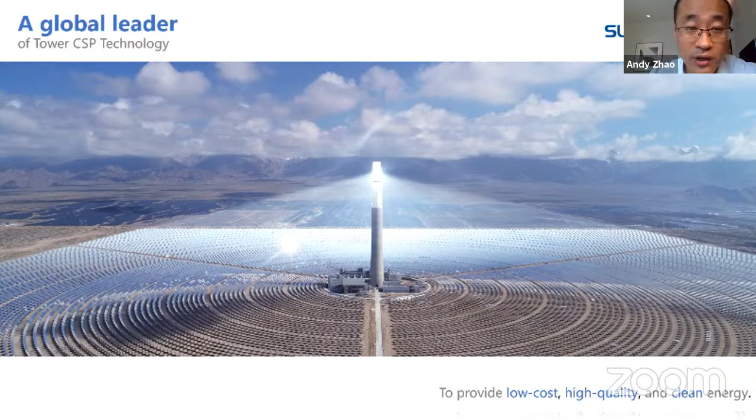First, please allow me a brief introduction of SUPCON Solar. We are a technology provider for tower CSP, and we are actively involved in international practice - for example, in IEC standards, in the World Bank promotion program, and also we answer the call of SolarPACES for technology innovation.

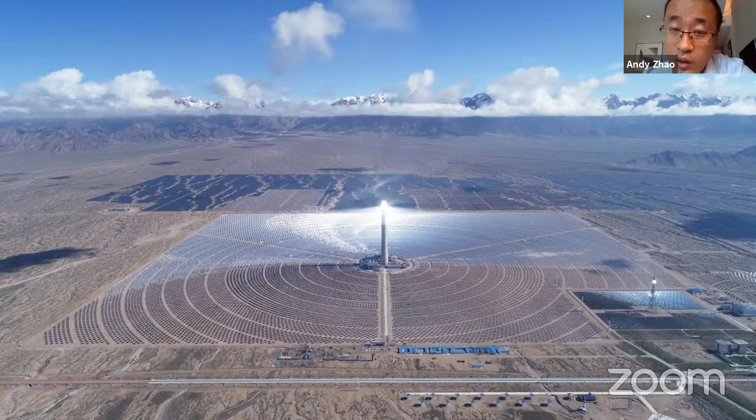Right now we have 4 references in and out of China. In August 2016, we delivered the Molten Salt Tower CSP, which is the first one in China and also the third one all around the world. The project performance has been quite well ever since.

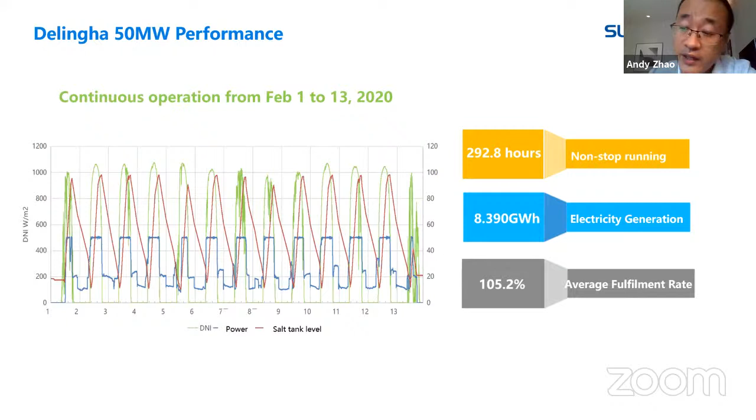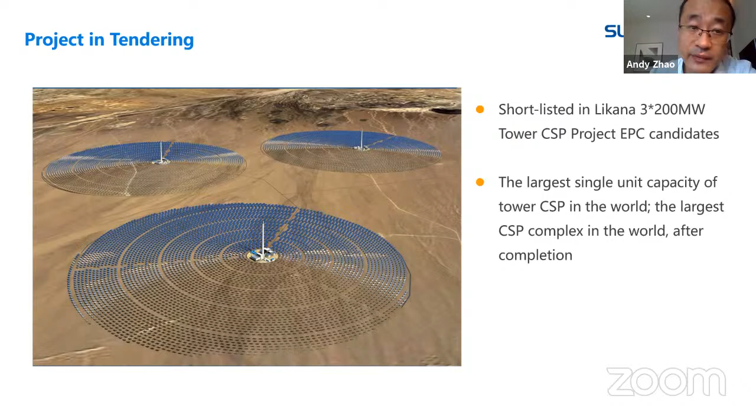Talking about energy storage, the first thing people think of is a battery, because it's so common in life - we have mobile phones, laptops, and electric vehicles. Because we are humans, we tend to accept what we are already familiar with. But is a battery really a universal solution, or is it just an illusion?

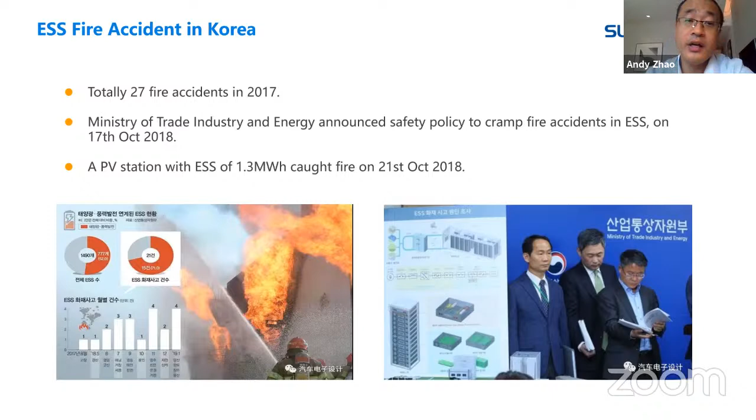In 2017, there were a total of 27 fire accidents in Korea, and the ministry announced a safety policy trying to clamp down on fire accidents. However, 4 days later, there was another fire. So what are the reasons leading to all these accidents? Here are the findings: battery defection, insulation failure, dusty operation environment, and also issues by system integration.

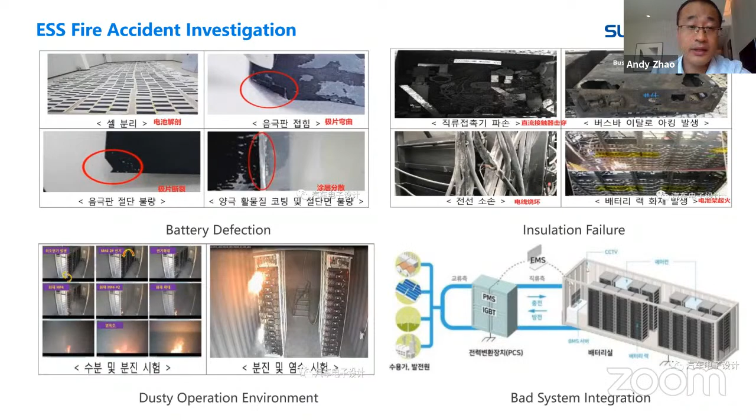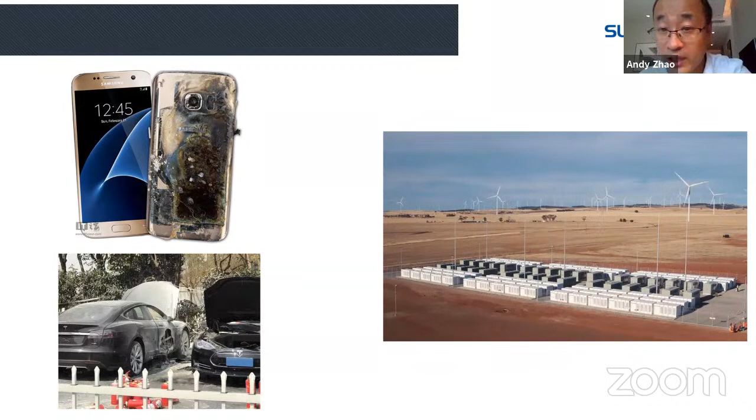So really, is the battery bankable, or is it more reliable, or is it safer, or more efficient, or cost effective? I think it's quite different from what people assume.

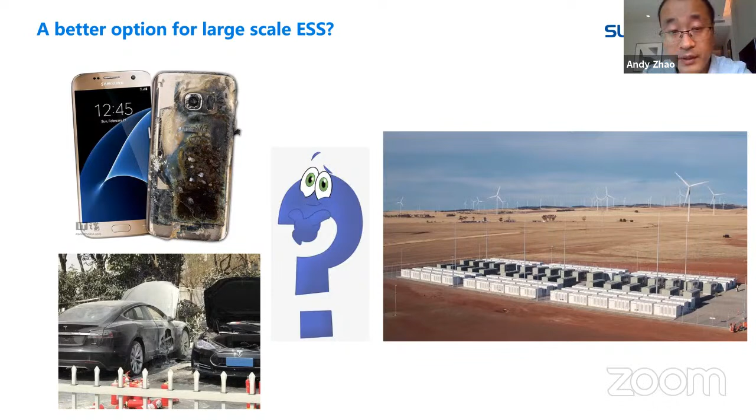So let's talk about molten salt and thermal energy storage. Actually, molten salt is not very mysterious because it's mainly used in industry and not for civil purpose, so common people are not very familiar with molten salt. And how about thermal energy storage - is it a very new idea?

Is molten salt only used in CSP? No - for example, it's also used in nuclear power and in the chemical industry. Is molten salt a recent application in CSP? No, because back in 1996 in the USA, in the Solar 2 CSP project, it was already being applied.

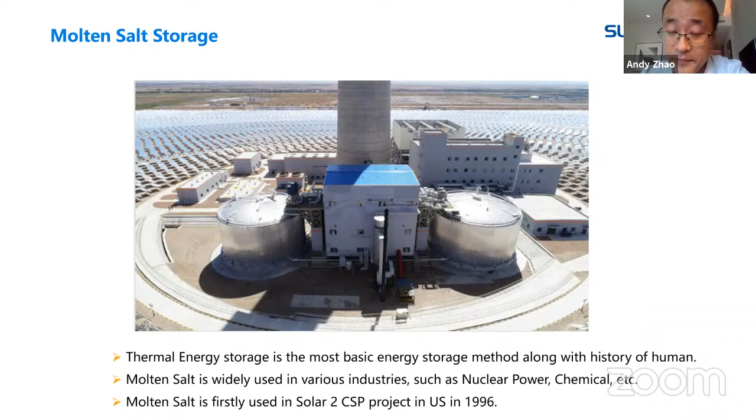But we do realize there are some challenges, and also some accidents related to molten salt. For example, there is one project where the molten salt got frozen in the pipe, and the whole downcomer became solid.

Yes, it's true, but is it unavoidable? No, it's not at all. This is why we have heat tracings following the whole route of the molten salt flow.

So why did it happen? What's the reason? Here are some of our assumptions: How about the heat tracing - does it work well, or is there any redundancy for the heat tracing? And is there any alarm for low temperature to the operators?

Has the operator spotted the alarm? Or if he already spotted the alarm, what action did he take? And if there is no alarm for the low temperature of the molten salt, then how about the temperature transmitter - does it work well, or is it located at the correct monitoring point? So this is our assumption.

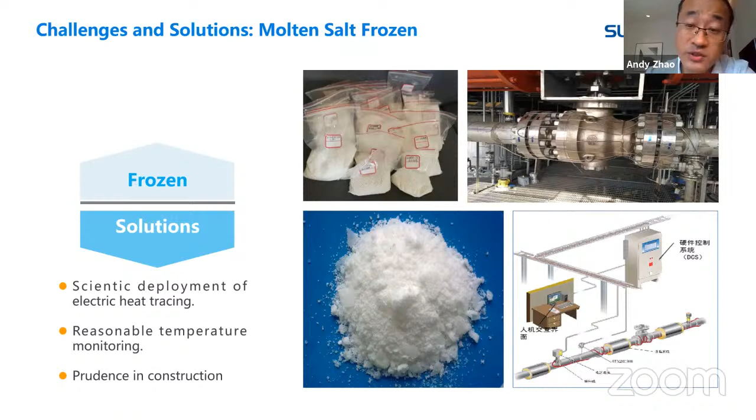Next topic is about the tank. Talking about tanks, people think of leakage, then get very nervous and very concerned. But I'd like to ask, how many molten salt CSP plants do we have around the whole world? Almost 50. So there is one leakage, and it seems all the molten salt tanks don't work well - that's not right, that's not the way to think about it.

Engineers will identify the potential risk in the structure and do the corresponding design to try to handle the thermal fatigue and also the thermal shock. And the same thing happens to the foundation, to the basis.

For example, engineers will optimize the design for the stress distribution to make it distributed evenly, and also make good ventilation for the foundation to prevent the temperature being very high on the concrete.

The third thing we need to keep in mind is the workers, I mean the welders, they have to be very careful. They have to follow the procedure and try to reach the standard. And the last thing is during operation, special attention has to be paid to the impact on the flow of the molten salt.

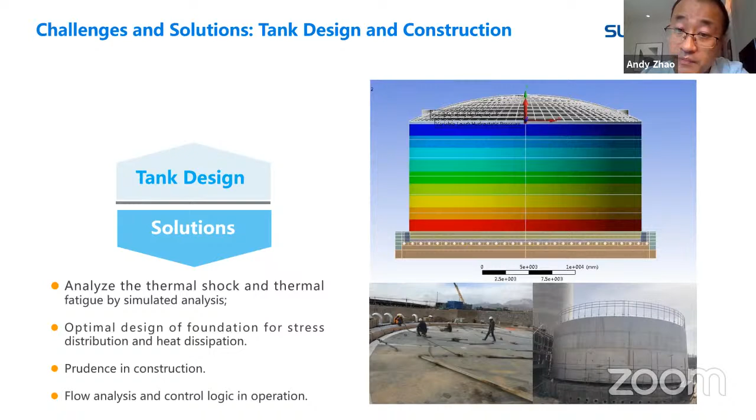Next topic is about the pump and the valve. They are a little bit different from the normal ones used. For example, for the molten salt pump, we use the long shaft pump vertically installed on top of the molten salt tank.

And also for the valves, there is a possibility that molten salt can get frozen inside, and in this way it will clog the molten salt valve and make it malfunction. And how to avoid it?

So we have to make some special design. We try to extend the valve stem a little bit and put heat tracing on the valve body to try to keep it warm. And another thing is we have to pay attention to the packings and the shims on the valve, just in case there will be any leakage.

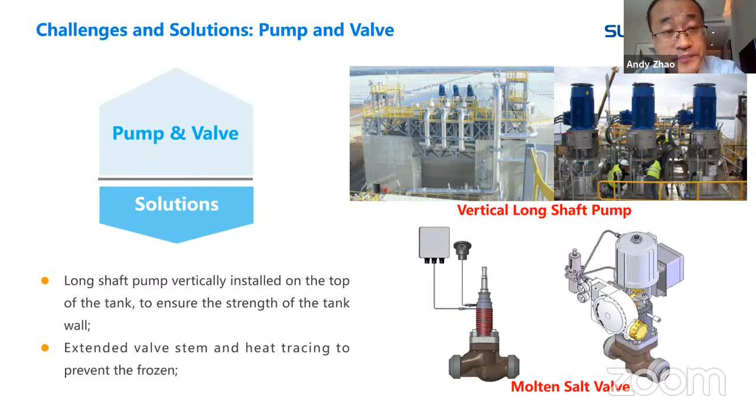And people also talk about the corrosion. The labs and also the research centers around the world conducted extensive tests on the corrosion on steel at different temperatures and for different time durations.

Their conclusion is the molten salt imparts very limited corrosion on the metal surface. So in the industry, what we try to do is control the purity of the molten salt, such as the content of chlorine, and also keep some extra margin in the metal thickness during the design.

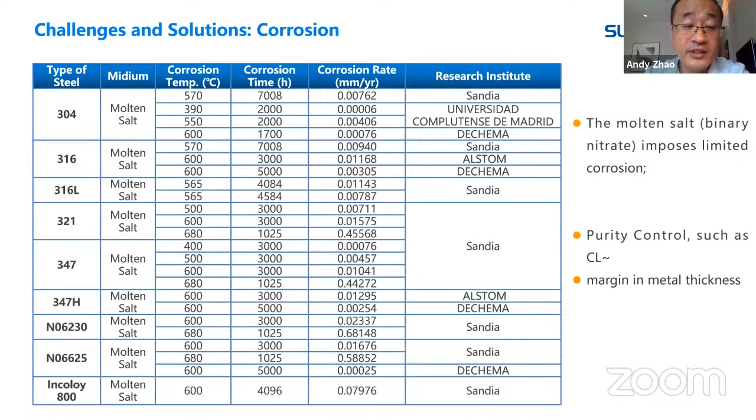This is what we have from the SUPCON project, which has already been operating for 5 years. We took down one piece of the molten salt pipe and checked inside, and we can see it's very clean and intact, with no sign of corrosion from the molten salt.

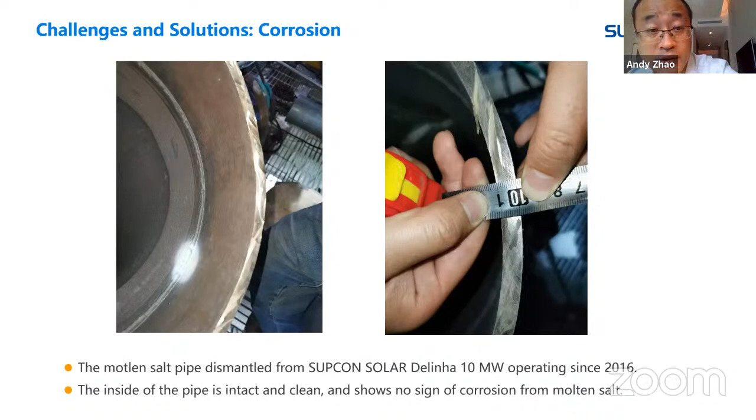The next topic is about maintenance. For the molten salt system, it's quite stable. The only attention we have to pay is on the packings and also the shims for the valves and the pumps. So we only need to do a regular inspection and replacement for these parts.

Luckily, this part is very easy to obtain and the cost is not very high, it's quite cheap. So in this way, the OPEX is very controllable.

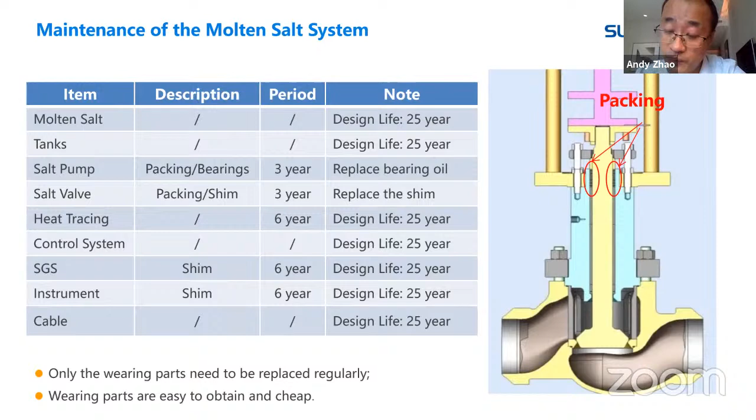But we think, compared with the battery, molten salt will play a very important role in the future energy matrix. We think molten salt as an energy storage could be applied in many different scenarios, especially for large scale energy storage. And we think molten salt is quite reliable, very efficient, safe, and economical compared with the battery.

Personally, I don't see any problem of the bankability. The question of bankability is only because people don't know it well, don't understand it well. So I suggest positive propaganda be conducted, so people could be educated, illuminated, and inspired.

And the last thing, but not the least, is the engineers have to be very careful. The construction workers have to be very careful. The operators have to be very careful. It's not because we are in the CSP industry, but it's because we are dedicated professionals.

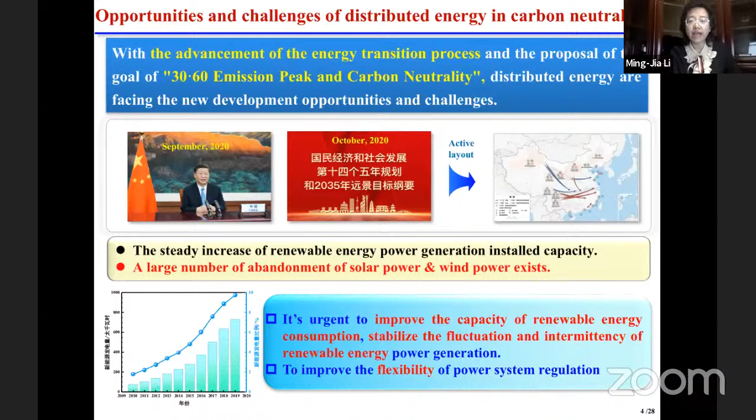That's why we always mention that opportunities and challenges exist side by side. Of course, we have very good chances here - the steady increase of renewable energy power generation installed capacity is very large. But in China, a large amount of abandoned solar power and wind power also goes unused. So it's really necessary for us to improve the capacity of renewable energy consumption to stabilize the fluctuation and intermittency, and finally to improve the flexibility of power system regulation.

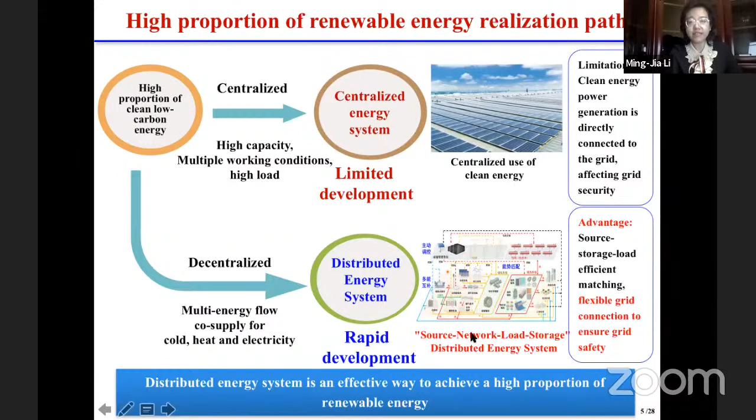Before, we already had some energy systems, but I categorize those as centralized energy systems - very large scale, such as very large coal-fired thermal power plants. Their advantage is high capacity and different working conditions with high load, but they also have a limitation: when connected with the grid, fluctuations will affect grid security. So today, we have to develop what we call source-network-load-storage, which characterizes the distributed energy system.

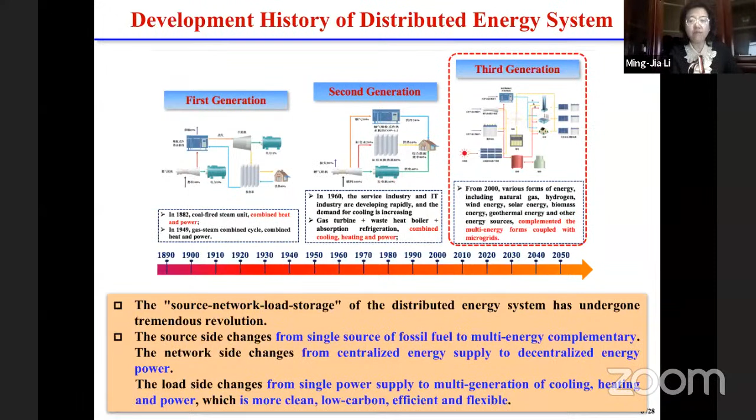Why these four words? Because they each have their own meaning. For the source side, it changed from single source of fossil fuel to multi-energy complementary. For the network side, it changed from centralized energy supply to decentralized energy power. And for the load side, it changed from single power supply to multi-generation supply including cooling and heating. This means we are now in the third generation distributed energy system, which will be more clean, low carbon, efficient, and flexible.

Of course there are many typical different distributed systems, but that's why today we talk about CSP. CSP is energy storage, and we think it can effectively solve the fluctuation of different renewable energy sources and the instability of peak load. We are familiar with this schematic diagram.

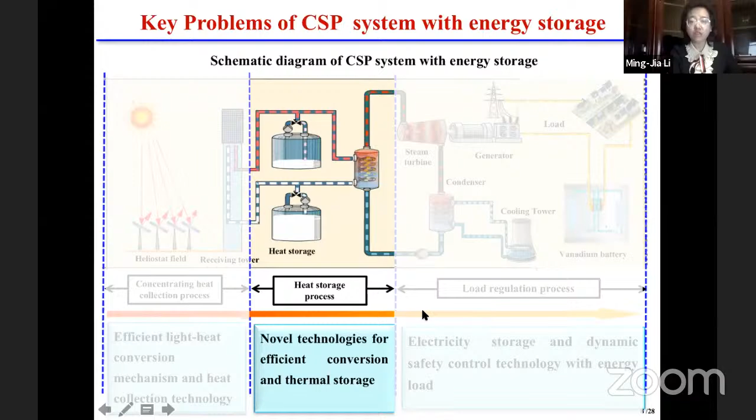There are scientific problems within the different processes, but today, because of time, I will only talk about the medium part, which is about novel technologies for efficient conversion and thermal storage - what we did in our research group. So this is the second part.

What is the idealized thermal system? We would like it to have the characteristics of high rate, high density, high quality, and low investment. But this is a very idealized situation, and there are lots of problems we need to overcome - the efficient mechanism of the multi-phase, multi-scale, and multi-carrier system is not yet clear.

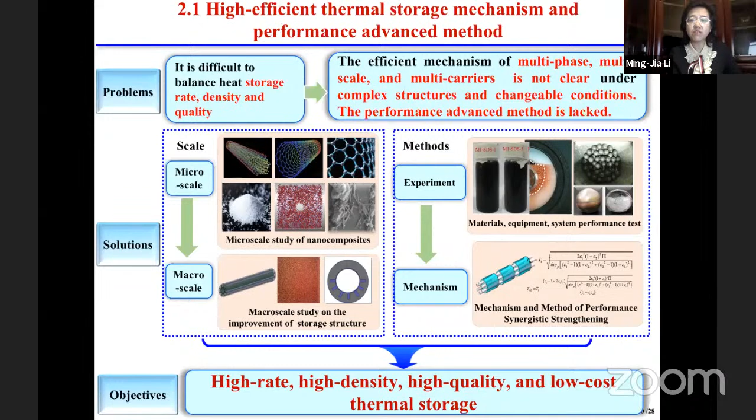Also, we have to design different complex structures and see how they work under different conditions. So we can conclude that the performance and advanced methods should be improved.

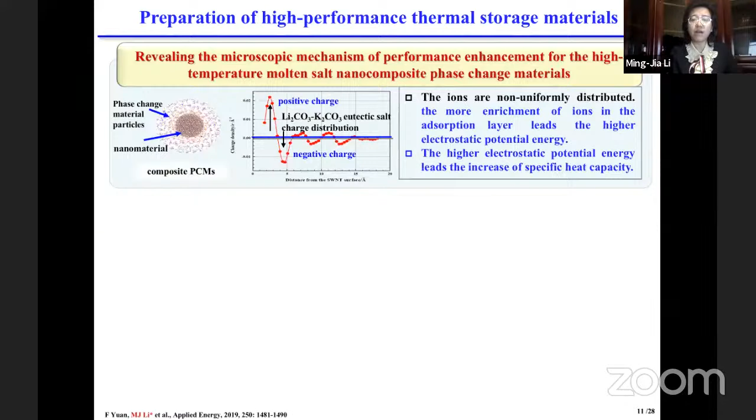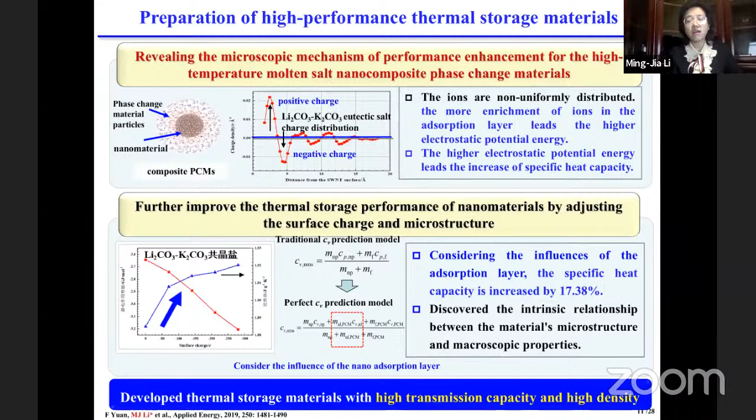From the material side, our group revealed the microscopic mechanism of different materials, such as molten salt and nano-composite phase change material, and improved their thermal performance by adjusting the surface charge of ions and the microstructure. After these methods, the specific heat capacity is increased by around 17%.

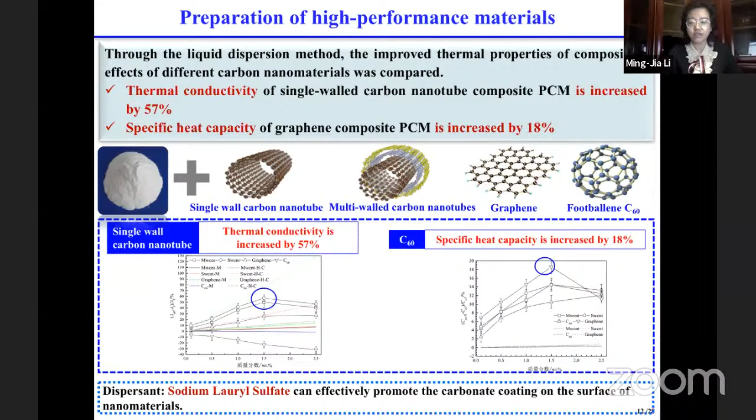We achieved this with high transmission capacity and high density. For example, we developed single-wall carbon nanotube composite PCM and graphene composite PCM. Through these methods, the thermal conductivity and specific heat capacity are highly increased, as you can tell from the figures. This is the first part, about the material.

We also need to enhance the thermal storage process. We know that a high storage rate doesn't necessarily mean high thermal conductivity, so we need to understand the mechanism. That's why we studied the storage conversion rules of the steady-state phase change storage process from both heat conduction and heat convection sides. We also designed different structures to improve performance, which highly increased the heat storage rate without affecting storage density or quality.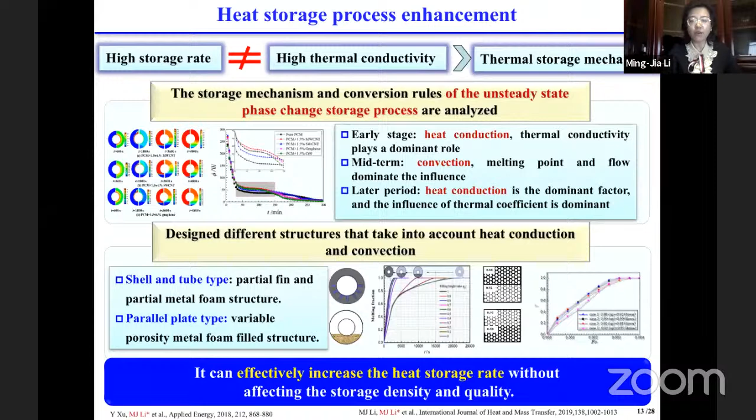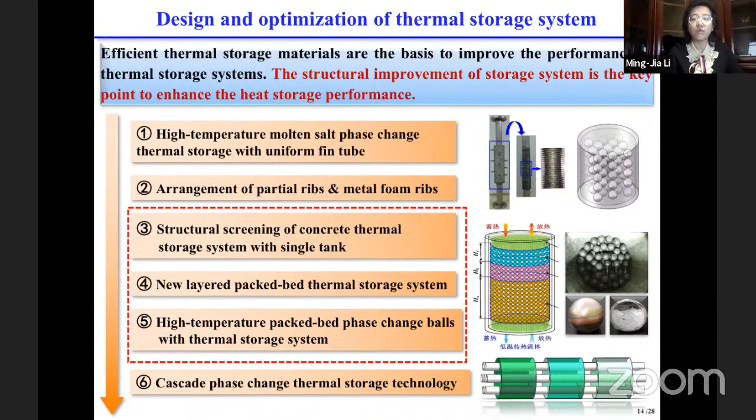The third part concerns the material and the heat storage process, and finally how the structure system works. In our research group, we developed research from point 1 to point 6. But today, due to time constraints, I'd like to share points 3, 4, and 5, which are about the sensible heat material and phase change material, and how they influence the system.

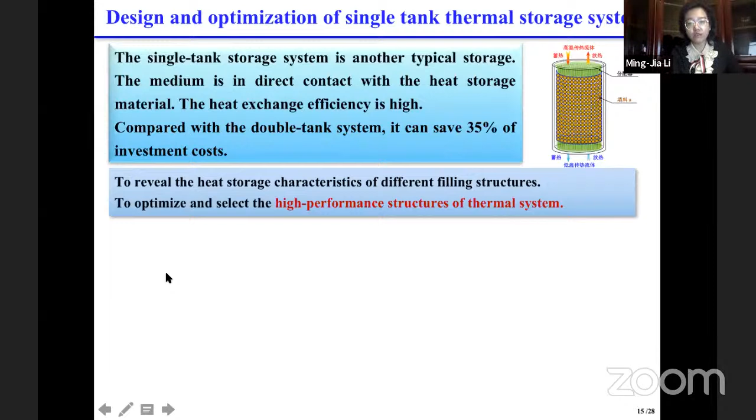Let's first look at the sensible heat material, concrete single tank. Compared with the double tank, the single tank can save 35% of the investment cost. But which structure is the best?

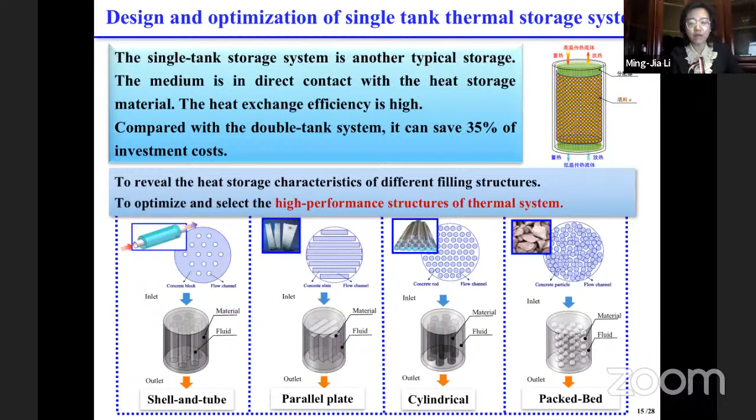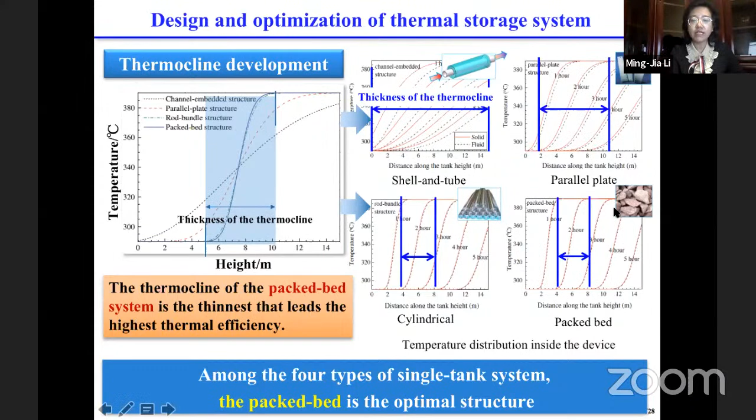We designed different structures, such as parallel plate, shell and tube, and packed-bed types, and analyzed them from the thermocline perspective. The one with the thinnest thermocline has the optimal structure. From these four diagrams, we found that the packed-bed system is the optimal choice.

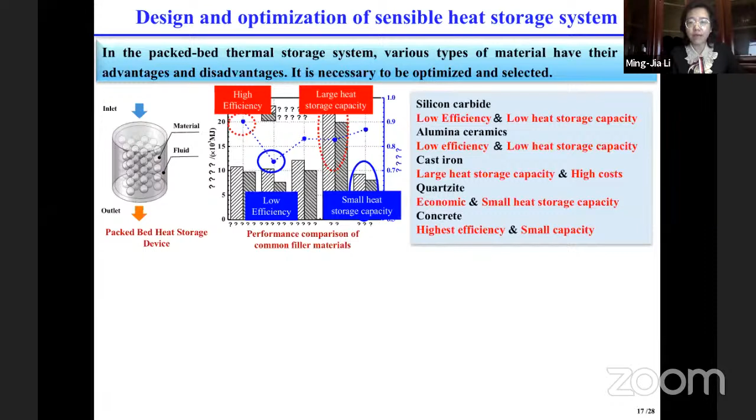Based on the packed-bed system, the next question is which material we should choose: concrete, cast iron, or ceramics. They all have their limitations and advantages, so in our view we have to realize the comprehensive advantage of each material.

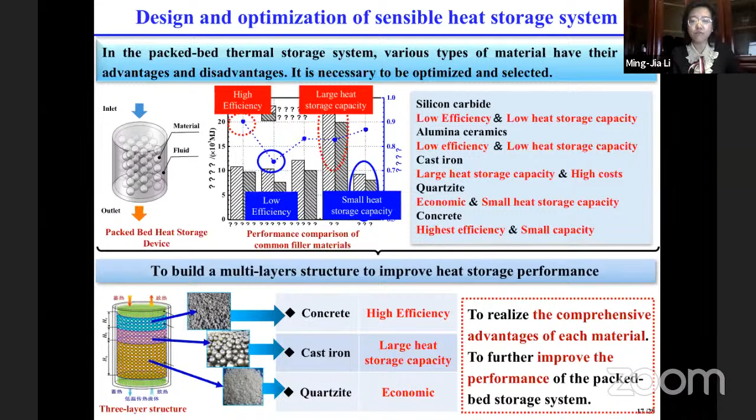After very complex theoretical analysis, we finally chose concrete, cast iron, and quartzite to build a three-layer structure, and made a performance comparison with pure quartzite. The effective storage was increased by around 27%.

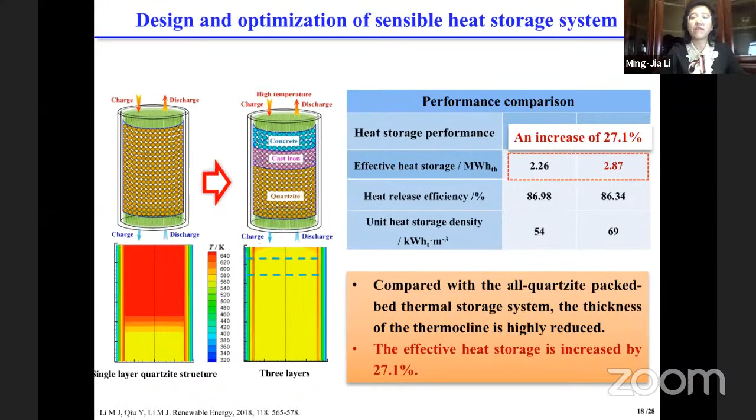And what about the phase change material? For this, we need a phase change ball which can contain the material. Another advantage of using the ball is that it enhances the heat transfer area, and the convective heat transfer coefficient can be highly increased.

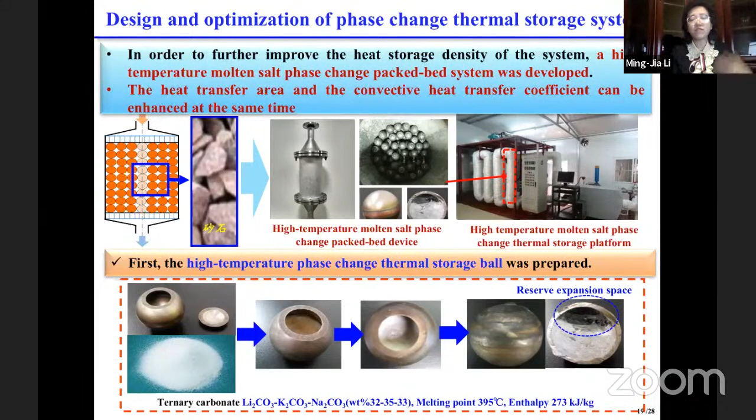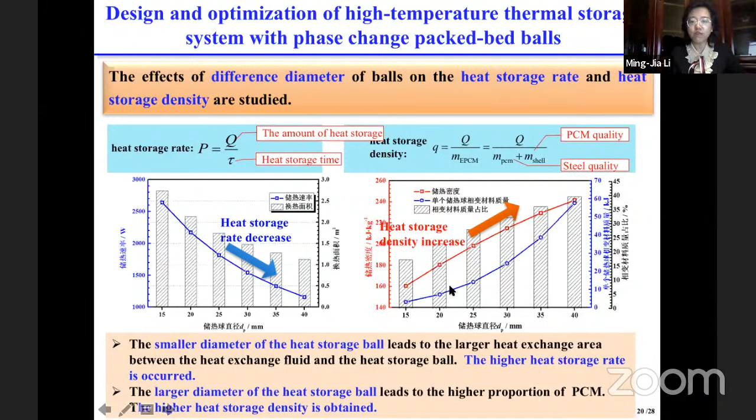After different parameter analysis, here's a simple example showing how different ball diameters lead to different performance results. From these two diagrams, you can see that a smaller diameter ball leads to a higher storage rate, but from the right-hand side, a larger diameter ball leads to higher density.

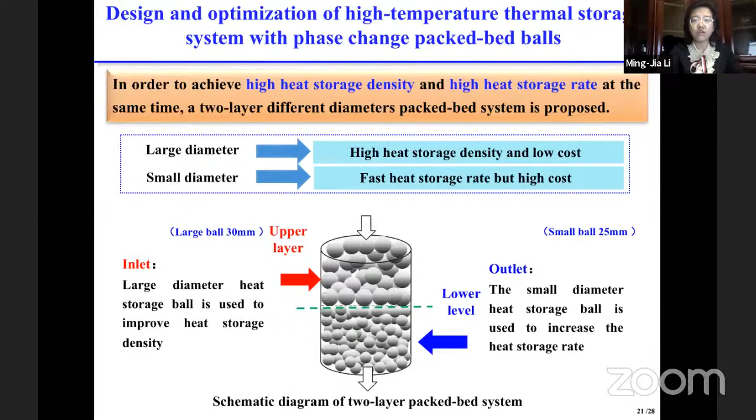What shall we do? We want high density, fast rate, but low investment cost, so we did a comprehensive optimization. As an upper layer, we chose the larger ball with a diameter of 30mm, and for the lower layer, we chose the optimized smaller ball at 25mm. We did both simulation analysis and experimental tests, and finally the heat storage performance was enhanced, with the heat storage rate increased by around 8%.

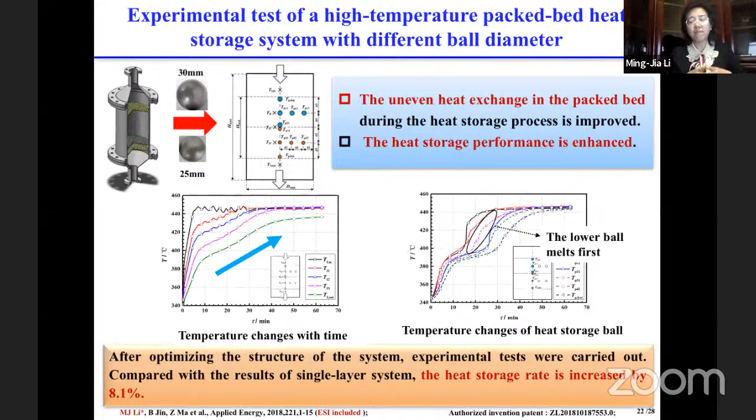So far, what I want to share with you is that to achieve bankable energy storage for our CSP, we have to use a synergistic enhancement method, combining material design, process enhancement, and system optimization. Finally, we can achieve these three highs and one low in thermal storage.

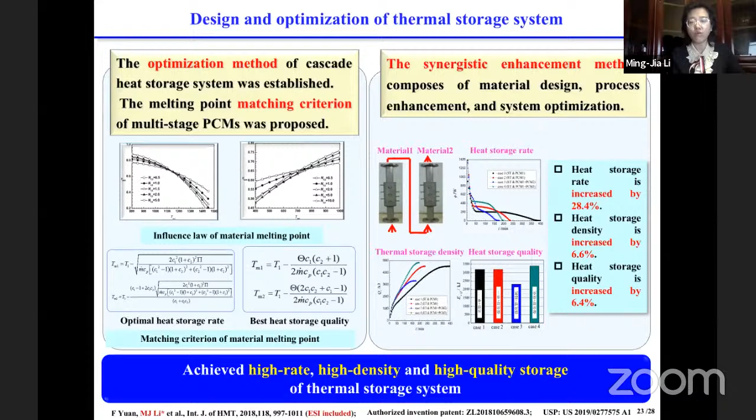And here is our product. Our research team designed this and cooperated to connect it with one of the parabolic trough solar power generation plants in Qinghai, China.

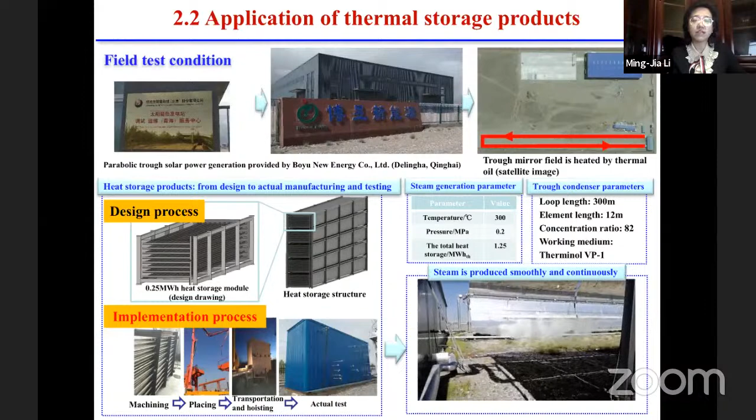This project is a concrete thermal power system, a thermal storage system. The advantage is that compared with international levels and domestic projects, the investment cost is very low, and the heat storage density is higher than that.

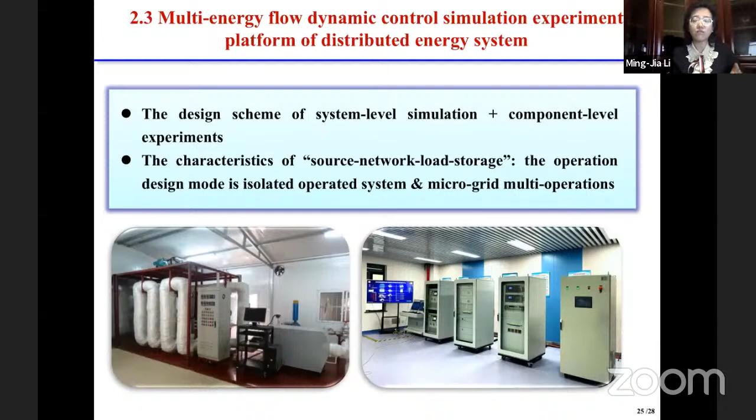Another point I'd like to share: in my opinion, thermal storage with CSP cannot be operated alone anymore. It has to be connected with a grid and network. That's why for our experiment test, I also developed a system that can not only simulate the network and load together for a whole commercial building or commercial area, but also do experiment tests with real load on this experiment platform.

So the summary for today: I firmly believe the CSP system with energy storage is helpful to realize large-scale and efficient utilization of clean and low-carbon energy. But we all have very difficult problems we need to come together to solve. Finally, we can have efficient, stable, economical, and safe operation of our CSP system. That's all about my presentation. Thank you very much for your attention.

Hello everyone. Recently we drafted a standard entitled Molten Salt Corrosion Testing and Assessment Methods for Solar Thermal Power Generation, released by CSTA. In this presentation, I will explain this standard in detail.

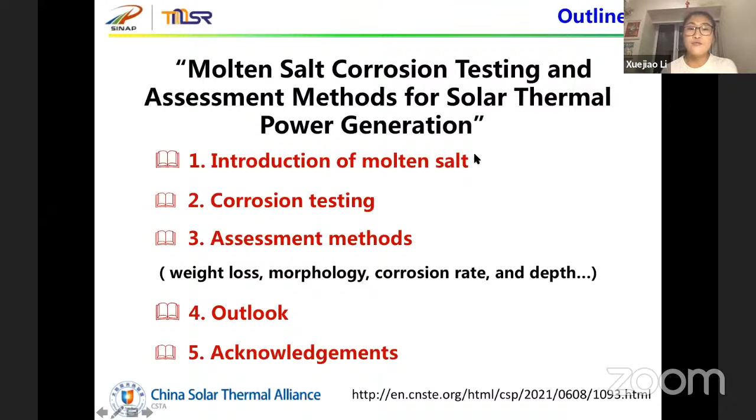Here is the outline. Let's start from the introduction of molten salt. The definition of molten salt is an ionic melt composed of cations and anions. The powdery salts melt into a liquid state and then cool into a dense solid state.

There are so many advantages of molten salt, for example the wide operating temperature range, high heat capacity and thermal conductivity, good chemical and thermal stabilities, low viscosity and vapor pressure, and low price. Especially, the salt resources are abundant in China. In a word, the properties of molten salt can be vividly described as soft as water, warm as fire.

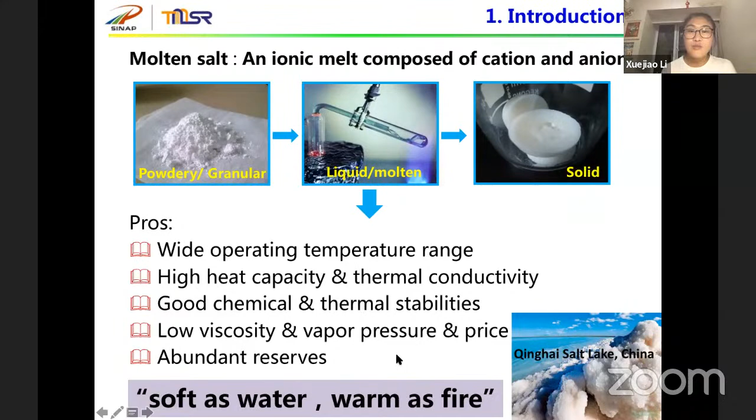Molten salts have wide applications in many fields. Here we focus on molten salts for CSP. This picture shows the main common salts, including nitrates, chlorides, fluorides, and carbonates.

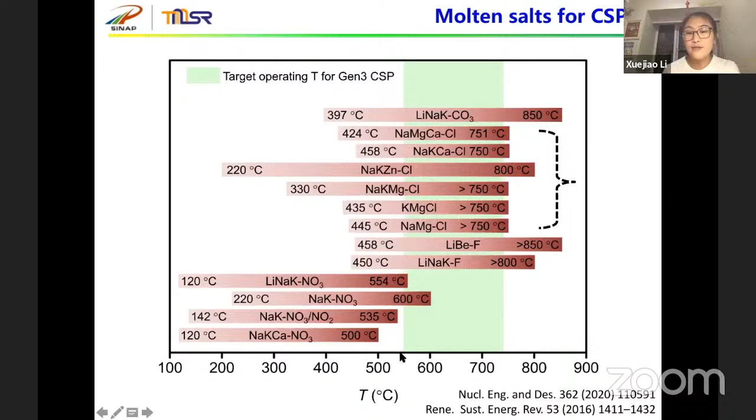The currently used nitrates, such as solar salt and hitec salt, are not stable at high temperature. The newly proposed chlorides are suitable for Generation 3 CSP above 550 degrees. However, the biggest challenge of chlorides is their strong corrosiveness.

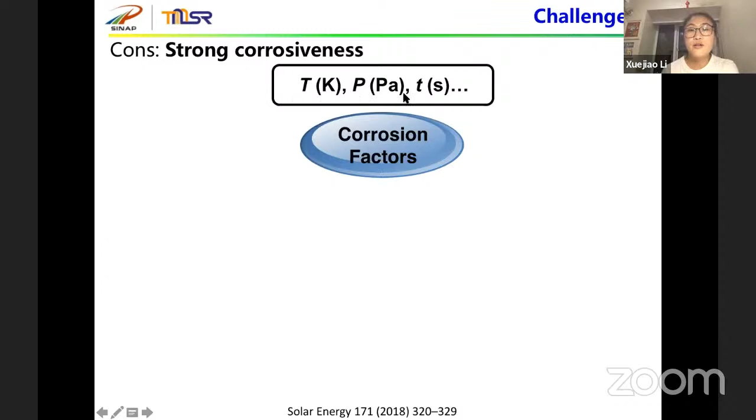The external corrosion factors of temperature, pressure, and corrosion time are important. Besides, the internal corrosion factors include two aspects: one is the container, the other is the molten salt. For the container, usually an alloy, the composition, machining, and welding processes are significant factors.

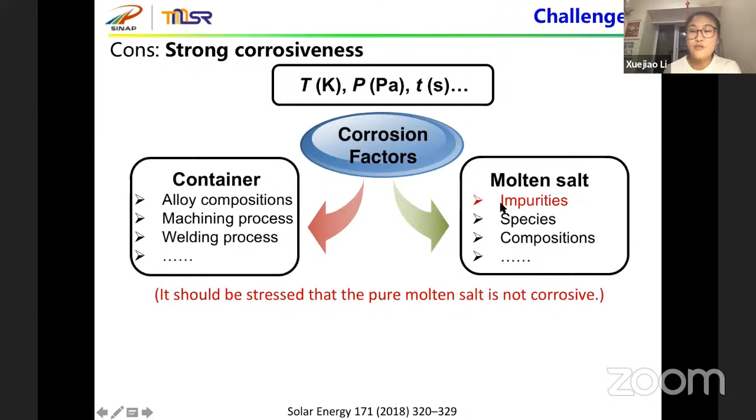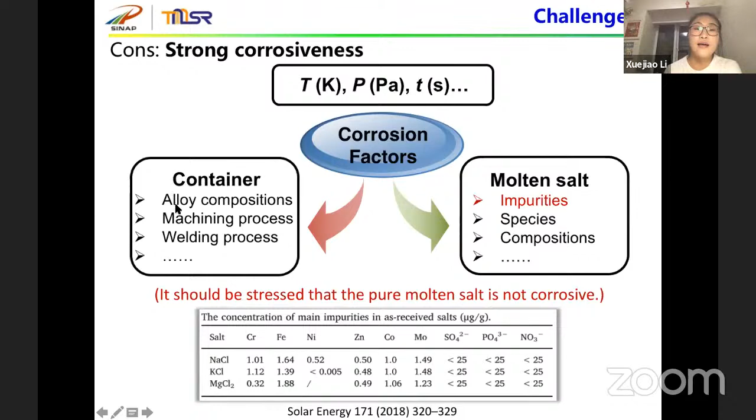Several perforated samples are suspended in the molten salt, which is put into a crucible, where the choice of crucible depends on the species of molten salt. All the corrosion tests are carried out under argon atmosphere.

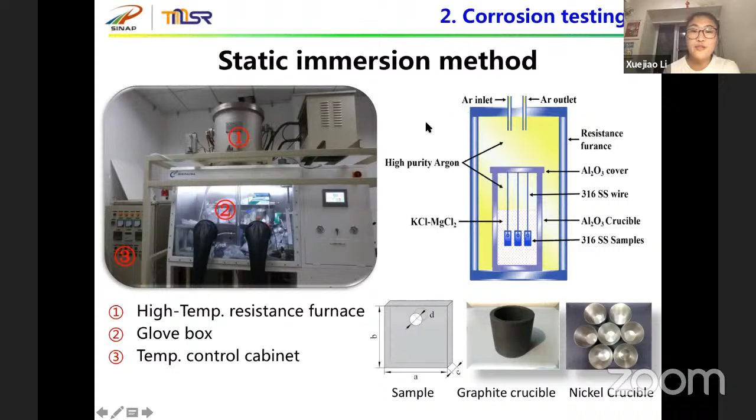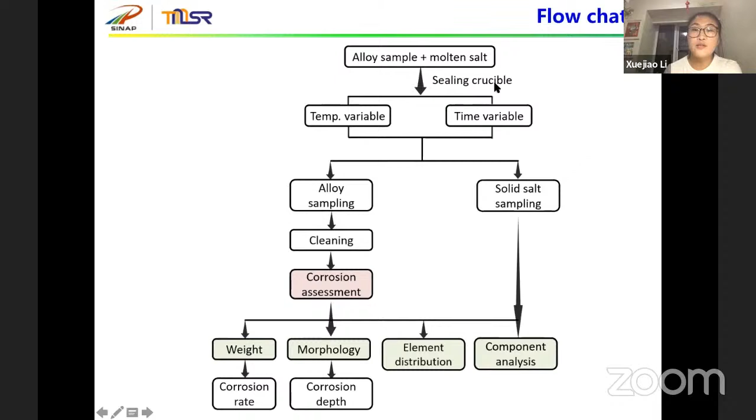This is the flow chart. The alloy sample and the molten salt are sealed into a crucible. Two variables are considered: one is temperature, the other is time.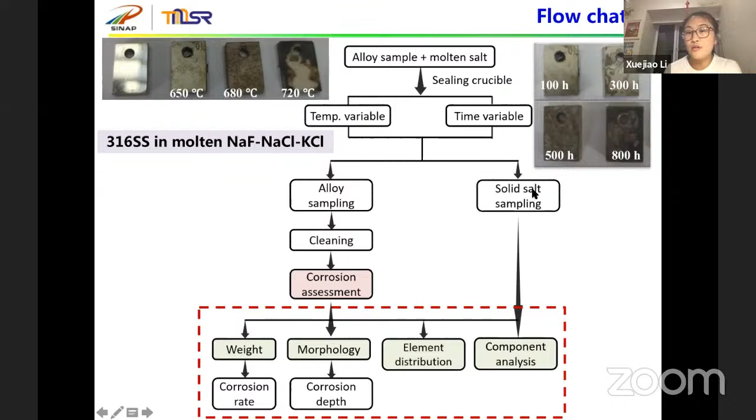Both components of the alloy and the solid salt are analyzed using the following instruments. For example, the SEM is used to observe the surface and cross-sectional morphologies. The EPMA is used to analyze element distributions, and the XRD is used to test the crystal phases of the alloy. The ICP-OES is used to detect the ionic concentrations of molten salts.

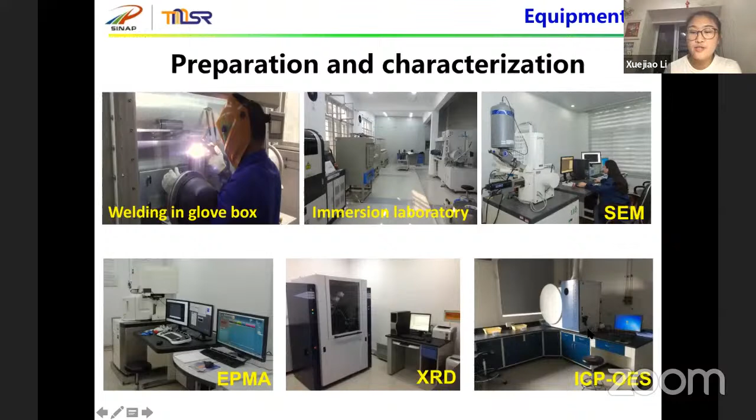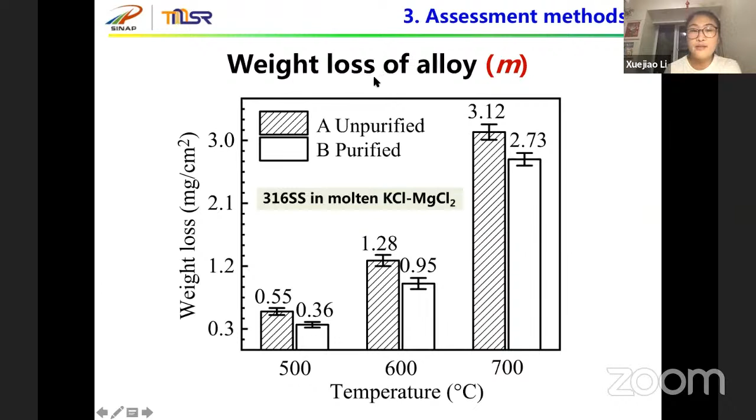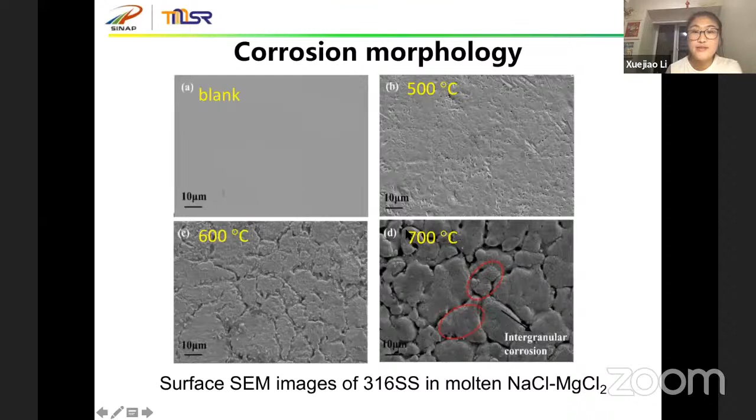Part 3 is the detailed corrosion assessment, including the weight loss of alloy, the morphology, the corrosion morphologies at different temperatures, the corrosion depths observed from the cross-sectional SEM images, and the corrosion rate calculated from the weight loss and the corrosion depths.

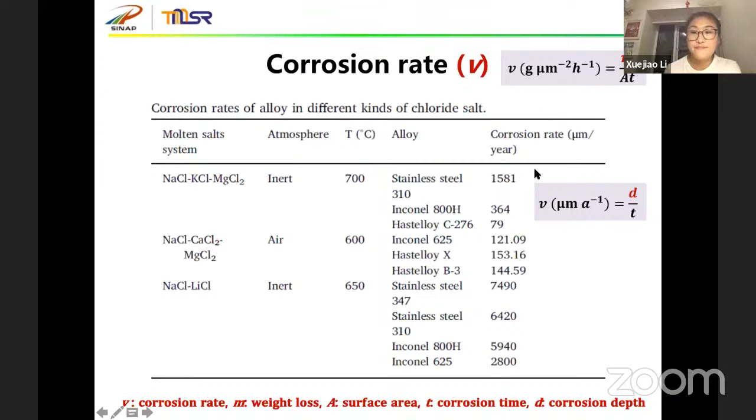From the element distribution by EPMA, we can clearly see the distribution of metal and non-metal elements, and further analyze the corrosion mechanism. For example, the intergranular migration of chromium can be found as temperature increases, and the nickel transports from the surface to the inside of the alloy.

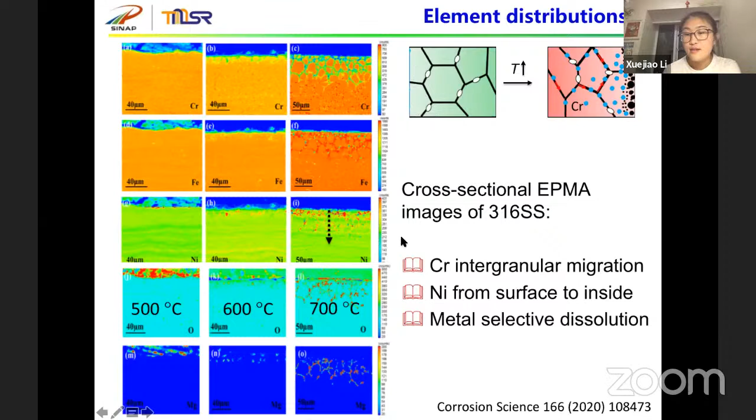Besides, the selective dissolution of iron and chromium from the alloy to molten salt can be verified by the increased ionic concentration.

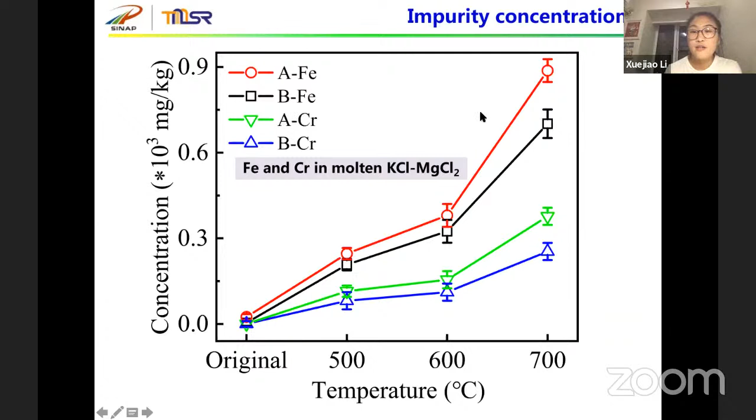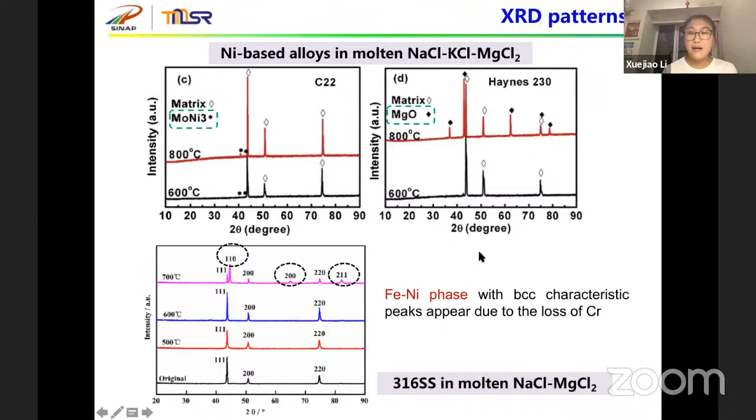The outlook: based on years of research experience, some prospects are made. First, the dehydration of molten salt is important. Except for water, other impurities should also be removed as much as possible.

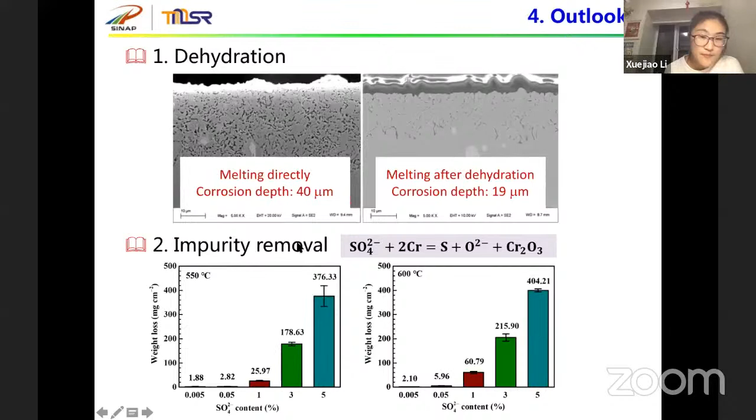Third, the reducing agent is helpful to inhibit corrosion. Fourth, the research of electrochemical corrosion is very important, especially the redox potential of ionic pairs in different molten salts.

And last, multi-scale simulations in combination with experiments are conducive to deeply understanding the corrosion mechanisms.

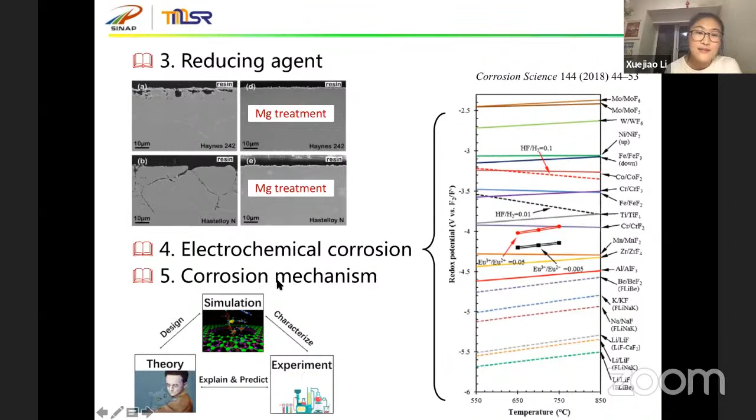Thank you very much for your presentation. It's very, very interesting, and I'm sure we'll have questions as well. I wanted to start with a general question, really.

So maybe Andy could start answering: which role do you see CSP with molten salt storage playing in the energy system? In some markets we are seeing it deployed to produce energy during evening peaks and after sunset, essentially. Is that the role you see in China, or would it be different? What are your thoughts?

Okay, Carlos, so I think CSP with molten salt storage will play a role mainly to cover the peak time. So from my point of view, during the off-peak time, I think it makes sense if there is another different technology that is cost effective and can cover the off-peak time.